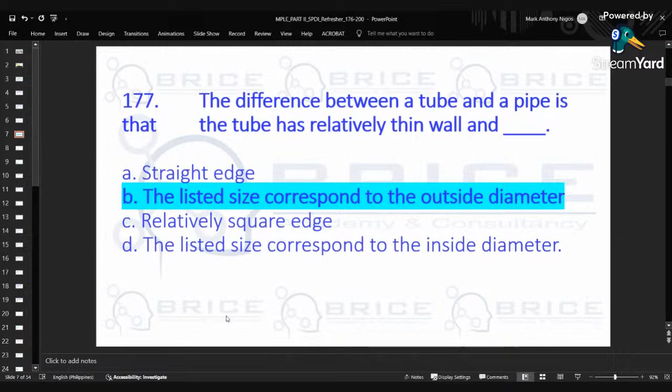177. The difference between a tube and a pipe is that the tube has relatively thin wall and a square edge, the listed size correspond to the outside diameter, while a pipe has a relatively square edge and the listed size corresponds to the inside diameter. The answer is B. The tube has a relatively square edge and the listed size corresponds to the outside diameter. So, yung listed yung sinasabing tube.

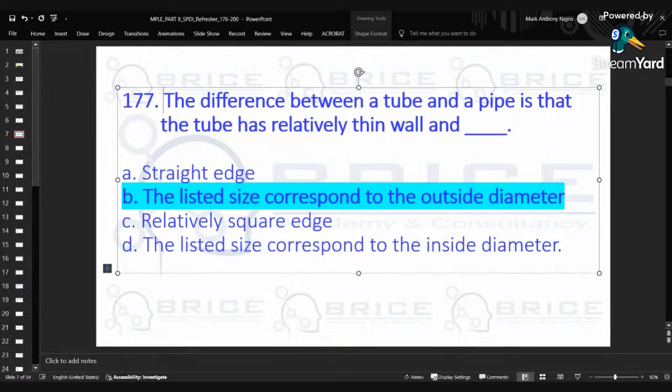178. What is the important advantage of chlorine compared to other water supply treatment? A, control the growth of algae. B, effective in the coagulation process. C, control the odor and kills bacteria. Answer is D, kills bacteria.

Ano pa ba? Sorry, alisin ko lang muna yung, ensure ko muna na wala nang istorbo.

Okay, next one is 179. What is the prescribed distance of vent from trap seal in plumbing installation? A, 1.5 meter, B, 6.6 meter, C, 2 meters, D, 1 meter. Answer is A, 1.5 meter.

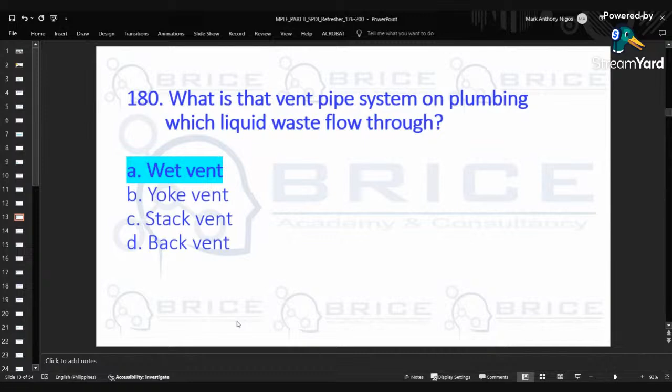Medyo fast-track tayo, no? 180. What is that vent pipe system on plumbing which liquid waste flow through? A, wet vent, B, yoke vent, C, stack vent, D, back vent. Answer is wet vent.

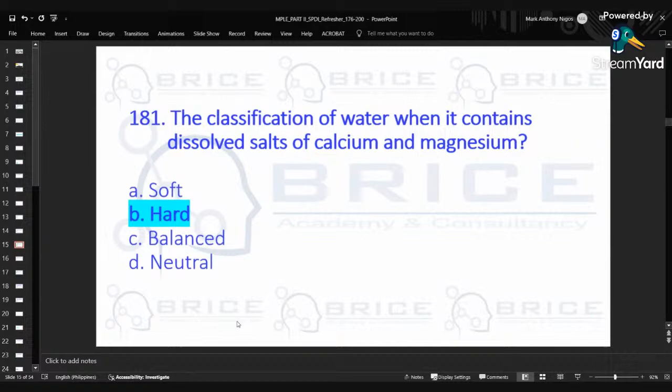181. Classification of water when it contains dissolved salts of calcium and magnesium. A. Soft. B. Hard. C. Balanced. D. Neutral. The answer is B, hard.

182. What is that bent pipe in plumbing that serves the building drain and the building sewer? A. BSTR. B. SBTR. C. Yoke vent. D. Relief vent. The answer is A, BSTR.

183. What is that receptacle attached to the plumbing system, other than a trap, on which water or waste may be collected or retained for ultimate discharge into the drainage? A. Catch basin. B. Manhole. C. Fixture. D. Drain. The answer is fixture.

184. How is water hardness measured? A. Ounce of hardness. B. Grains per gallon. C. Parts per million. D. Soap suds. Answer is A, ounce of hardness.

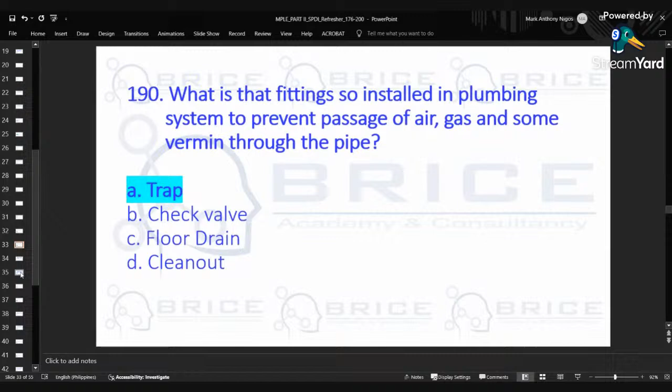191. What is that fitting that operates automatically when refilling the water tank after each discharge and shuts off completely when the tank is already full? A. Float valve. B. Foot valve. C. Pressure regulating valve. D. Check valve. The answer is A, Float valve.

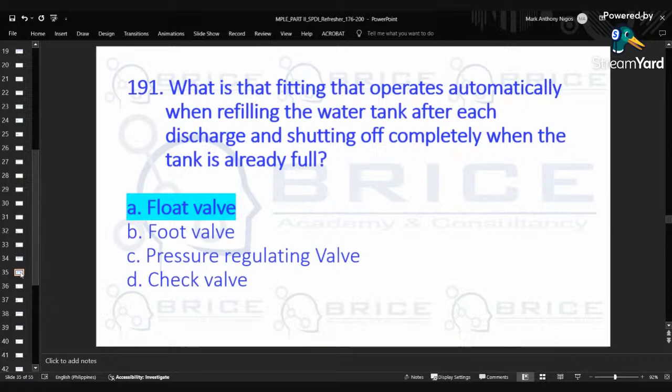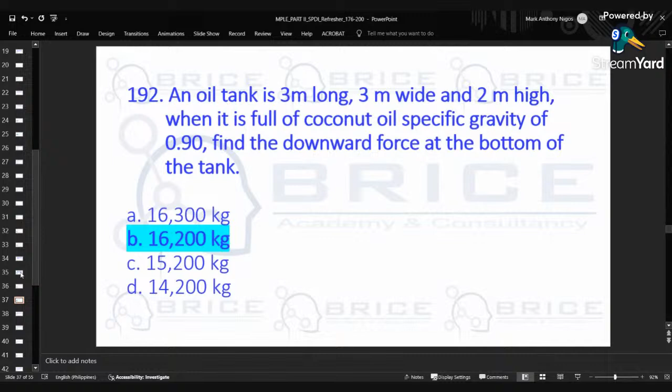192. An oil tank is 3 meters long, 3 meters wide, and 2 meters high. When it's full of coconut oil with specific gravity of 0.9, find the downward force at the bottom of the tank. The answer is 16,200. I'll just put the solution in the comment section, sorry I won't include it here.

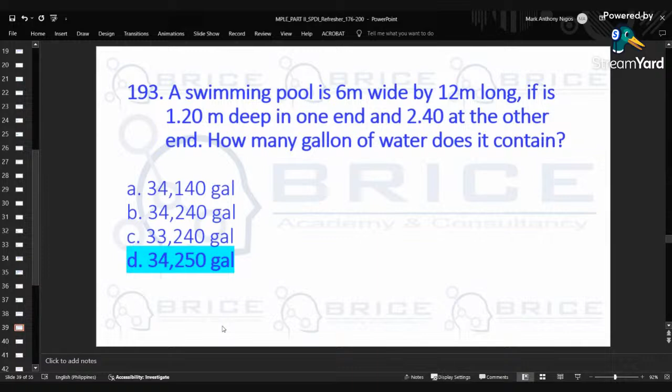Cubic meters to gallons. So, makukuha natin to. Lalagay na lang ulit yung solution sa comment section, para kung may nakapanood na nito, pakilagay na lang din. Pero ilalagay ko na lang din yung solution.

Number 194: A rectangular ground reservoir is to be constructed to serve the water supply requirement for a commercial building. The outside dimension of the reservoir is 8 meters long, 6 meters wide, and 8 meters deep. Compute for the total cost of excavation if the cost of labor is P50 per cubic meter.

A, 1,920. B, 19,200. C, 18,200. D, 1,820. The answer is 19,200. So, paano nakuha yan?

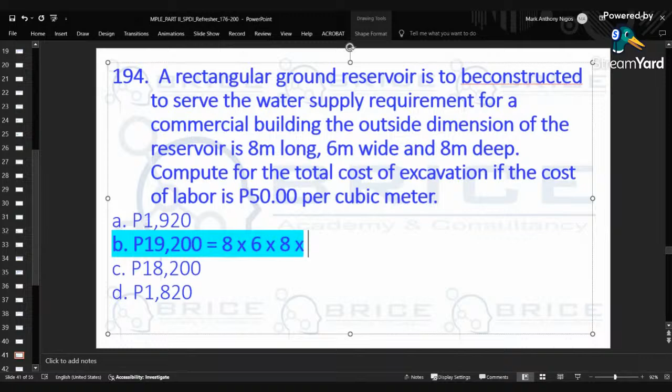Dali lang naman. Multiply natin 8 times 6 times 8 times 50. 8 meter long times 6 meter wide times 8 meter deep times 50 per cubic meter. The answer is 19,200.

Number 195: A plumber is to use a deep well as a source of water to supply for the building under construction, and he wants to estimate the length of intake pipe. So from the surface of the ground, he dropped a coin into the well. After 2 seconds, he heard splashing sound down under the deep. How deep is the well?

May computation na naman to. A, 32.2 feet. B, 64 feet. C, 22.2 feet. D, 33 feet. The answer is C, 22.2 feet.

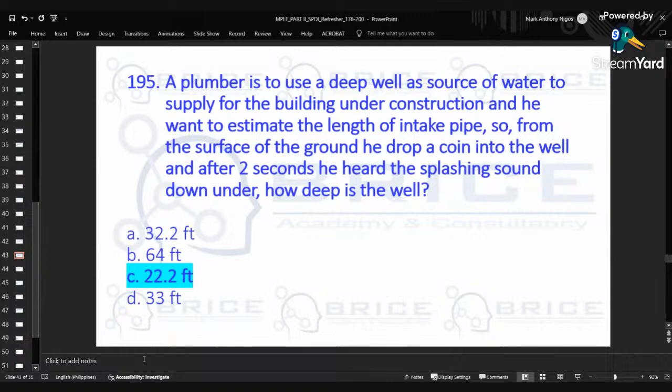A plumber is to use a deep well as a source of water to supply for building under construction, and he wants to estimate the length of intake. So from the surface of the ground, he drops a coin into the well, and after 2 seconds, he heard the splashing sound down under. How deep is the well? So, yun. Assignment ulit. Ayan, computation. The answer is 22.2, no?

Acceleration due to gravity times, yan, no?

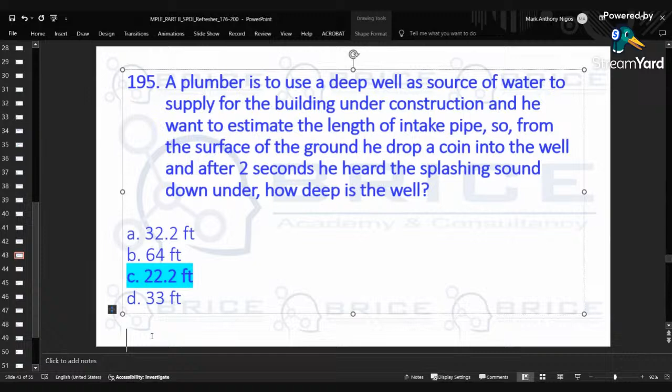Number 196: Secondary pipeline in sewerage. Common sewer to which no other sewer is tributary is called A, interceptor. B, lateral. C, dead end. D, branch. The answer is lateral.

Secondary pipeline in sewerage. Common sewer to which no other sewer is tributary is called B, lateral.

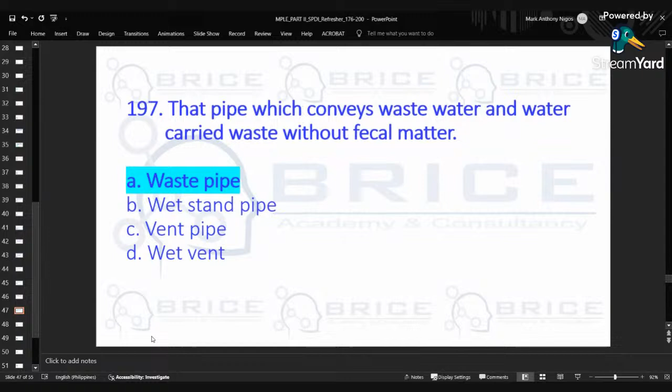Number 197: That pipe which conveys wastewater and water-carried waste without fecal matter. A, waste pipe. B, wet stand pipe. C, vent pipe. D, wet vent. The answer is A, waste pipe. The pipe which conveys wastewater and water waste without fecal matter is waste pipe.

Number 198: A bacteria living or active in the absence of free oxygen is called A, aerobic bacteria. B, anaerobic. C, facultative aerobic. D, all of the above. The answer is anaerobic. Anaerobic is a bacteria living or active in the absence of free oxygen.

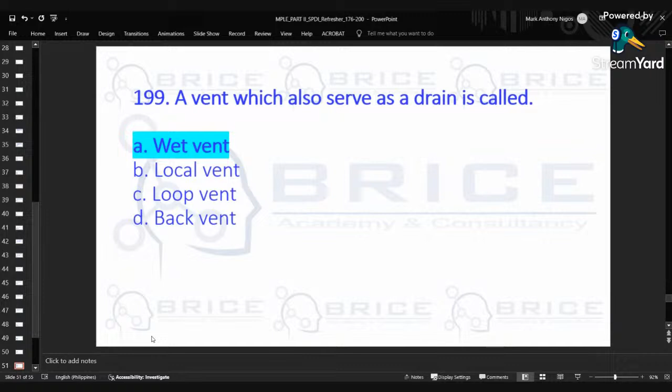The answer is anaerobic. Number 199: A vent which also serves as a drain is called A, wet vent. B, local vent. C, loop vent. D, back vent. The answer is A, wet vent. Wet vent is a vent which also serves as a drain. The answer is wet vent.

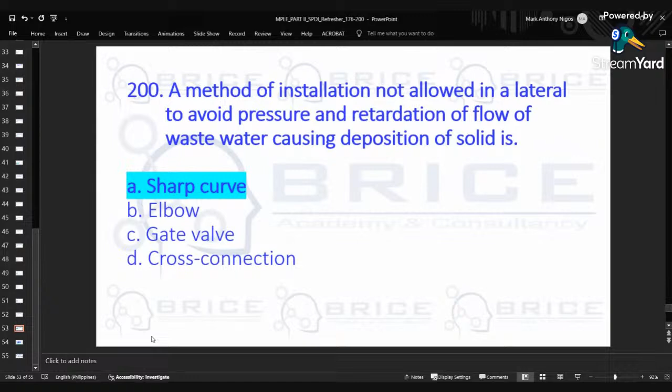And the last question in this refresher course session: a method of installation not allowed in a lateral to avoid pressure and retardation flow of wastewater causing deposition of solid is A, sharp curve. B, elbow. C, gate valve. D, cross-connection. The answer is sharp curve. Method of installation not allowed in lateral to avoid pressure and retardation of flow of wastewater causing deposition of solid is called sharp curve.